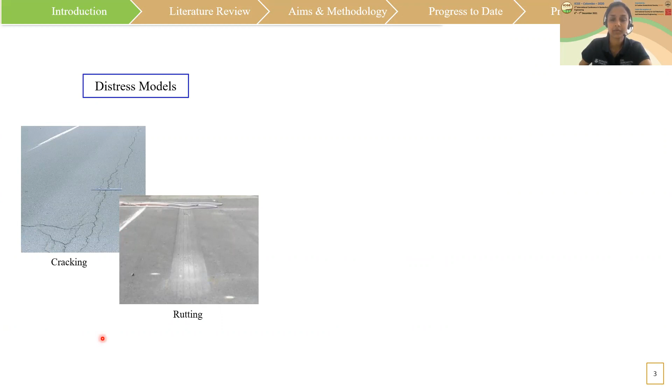To give a brief introduction, various pavement distresses, including cracking, rutting, wear, and deflection, are important indicators of pavement performance. There are many factors that affect how the pavement behaves, such as traffic loading, climatic changes, and pavement materials, which lead to these distresses. Therefore, it is important that we monitor these loads and temperatures to accurately predict pavement performance and also to make assumptions of rutting and fatigue phenomena.

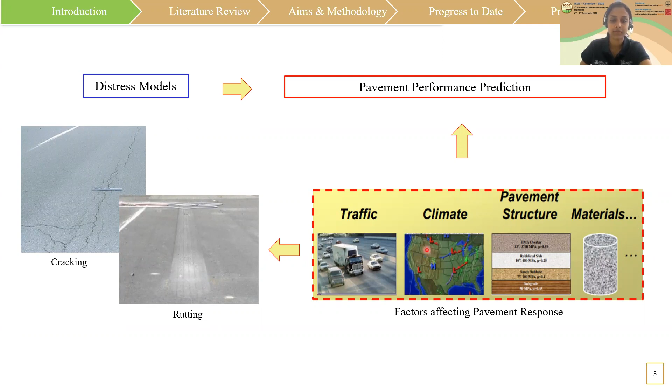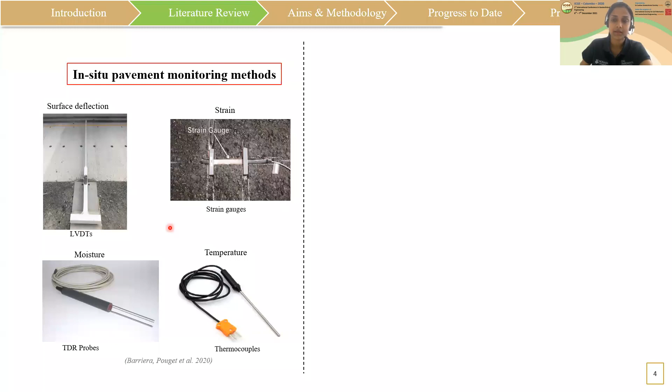Currently, pavement monitoring depends mostly on in-situ measurement techniques. These allow real-time monitoring of the road health condition in terms of stress, strain, deflection, temperature, and moisture content by integrating sensors within the road. However, most of the methods are intrusive, while they also can only provide information on discrete locations.

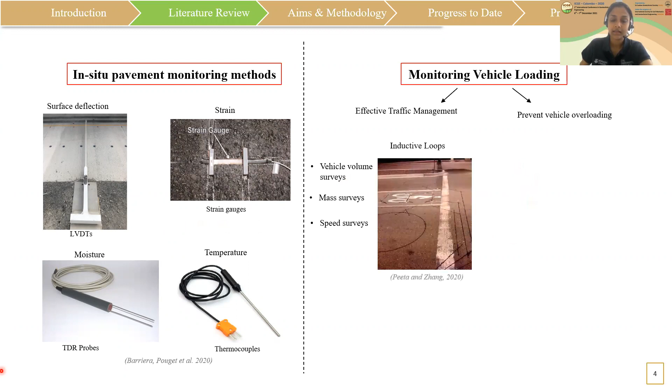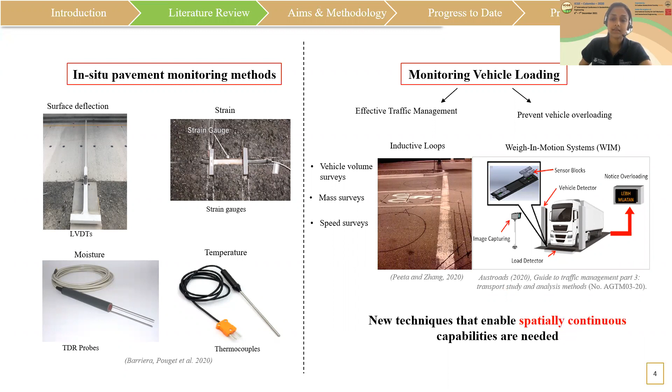Additionally, monitoring vehicle loading is also crucial for effective traffic management and to prevent vehicle overloading. For example, one overloaded heavy vehicle causes several times greater damage to the pavement structure than a properly loaded one. Therefore, vehicle volume surveys, mass and speed surveys are important. Inductive loops and weigh-in-motion systems are two of the most accepted technologies used by Australian road agencies for this purpose. However, the installation and maintenance of these systems are extremely strenuous. Therefore, it is understood that new techniques are needed that enable spatially continuous monitoring of pavements.

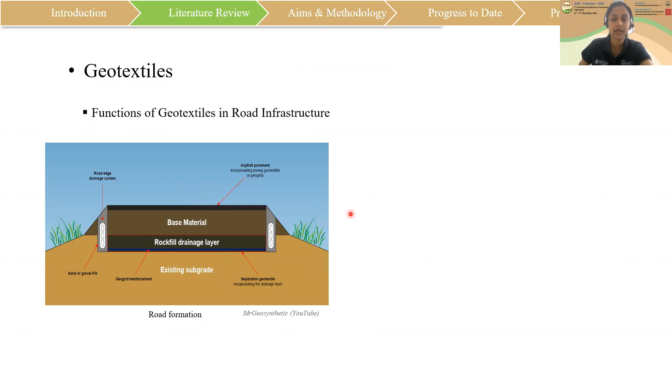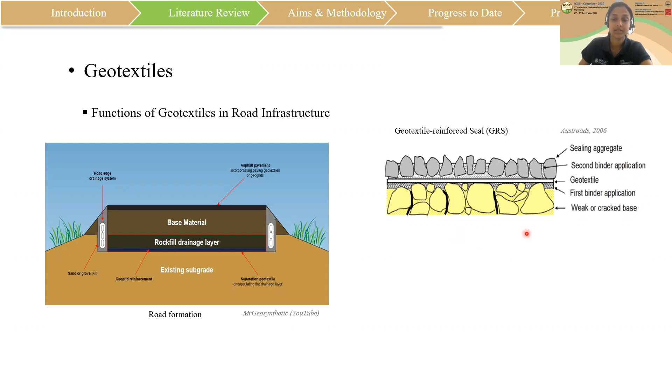Talking about geotextiles, in the scope of pavements, a typical road formation will have various components where geotextiles have applications in separation, reinforcement, drainage, and sealing. Also, nonwoven geotextiles are used in geotextile reinforced seals, or GRS, to reduce reflective cracking from underlying cracked pavements. Geotextile reinforced seals can be used to provide more robust waterproofing and as a SAM or SAMI treatment.

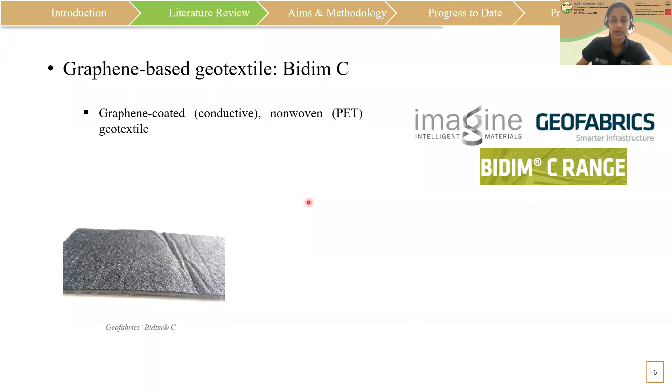Geofabrics Australasia, using the graphene technology of Imagine Intelligent Materials, has manufactured a graphene-based geotextile named Bidim C. This is a non-woven geotextile with the graphene coating on one side. Graphene is a highly conductive material, and the integration of graphene to the geotextile gives it promising conductive properties. It is used to test liners for defects via a closed electrical circuit forming at the leak location through the geotextile, and is currently used in waste, containment, and landfill applications. This invention provides a way to still keep the same purpose that the geotextile is designed for, with an added function of sensing, which enhances its benefit in any structure it is used in.

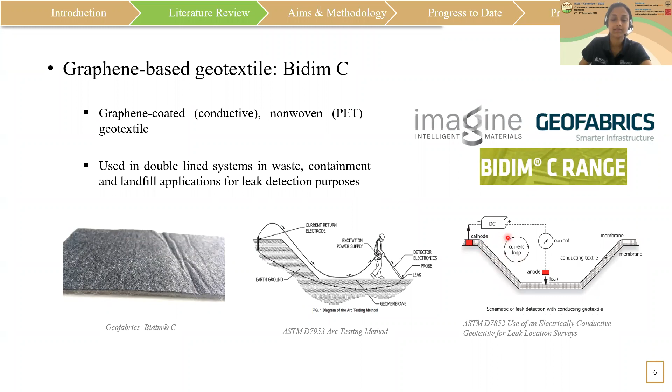So how can we potentially use this material in pavements? If we take this picture here, several current paths exist between any two points on this graphene coating. And as an external stimulus is applied, the connections between the graphene fibers or the conductive parts are distorted, which manifests as a change in electrical resistance. So if the material is conductive, its electrical resistance can indicate how much deformation the material has undergone. And when these two variables are reliably related, they can be standardized for field applications.

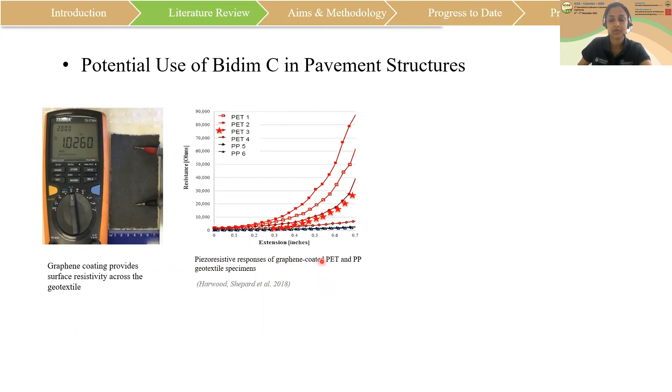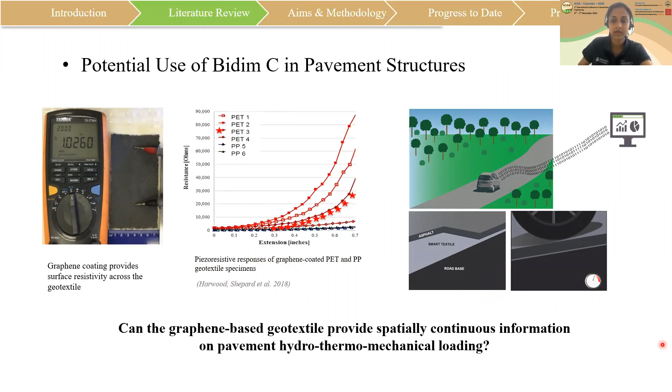This builds the key research question of my project: can the graphene-based geotextile provide spatially continuous information on pavement hydro-thermo-mechanical loading? To answer this, the project is arranged in achieving three main aims. The first is to characterize the electrical response of the geotextile under different loading conditions and to develop preliminary analytics. The second aim is to capture the response using an experimentally validated numerical model. And the final aim is to develop an appropriate field measurement technique.

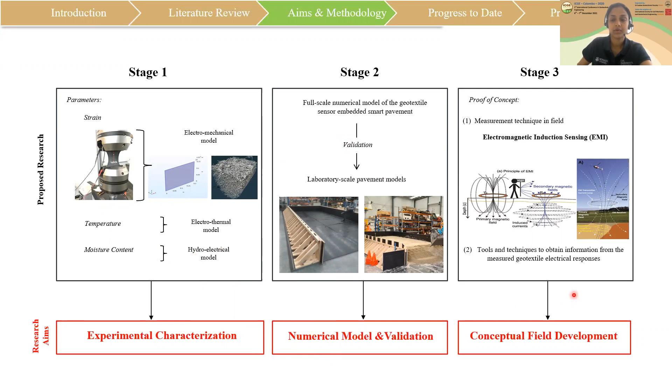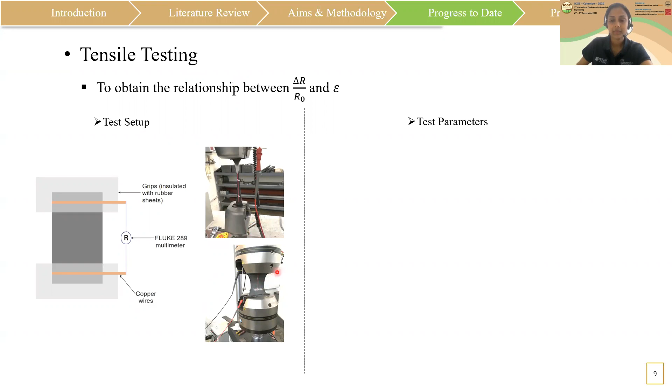Moving on to the research carried out to date, to characterize the material, tensile tests were conducted to obtain the relationship between relative resistance change and strain. The resistance of the material was measured while the sample was being extended. Test standard wide width tensile test parameters for geotextiles were used, and samples of both machine direction and cross machine direction were tested to find if there is any direction dependency in the electrical behavior. Four specimen sizes were used to see the effect of size on the resistance variation, and the obtained data was fitted into a linear curve to calculate the slope, also known as the gauge factor for each specimen.

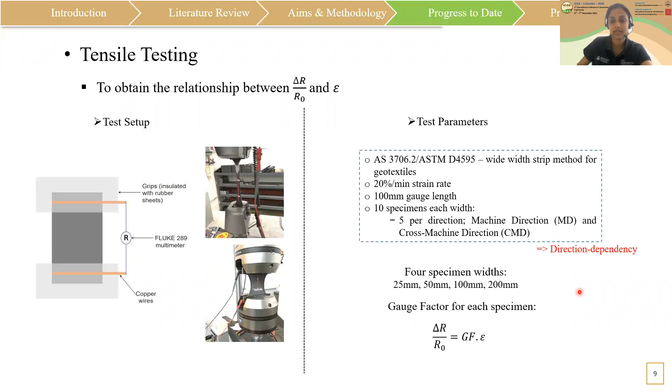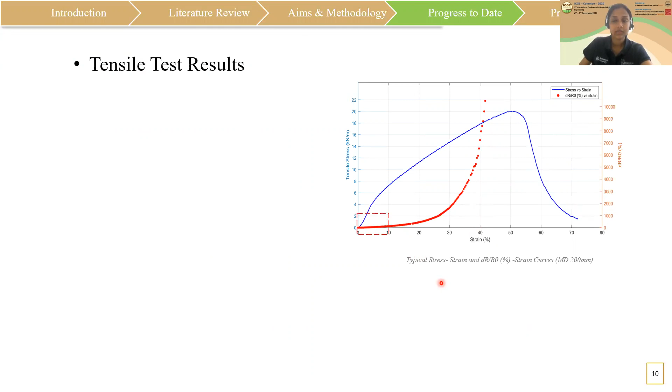This figure shows the typical stress-strain relationship and the dR over R naught versus strain relationship obtained by the above tensile tests. As this project is aimed at applications in road infrastructure, strains only up to 10% were used for further analysis.

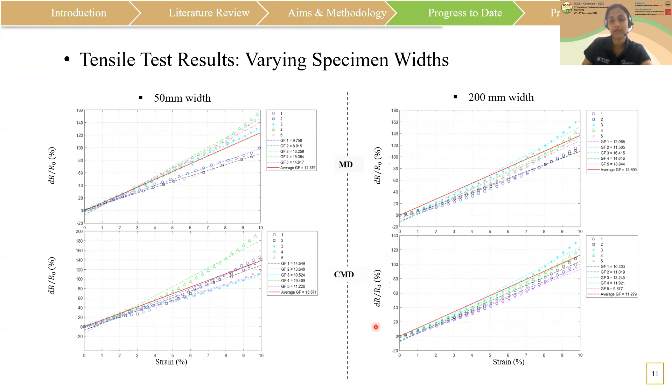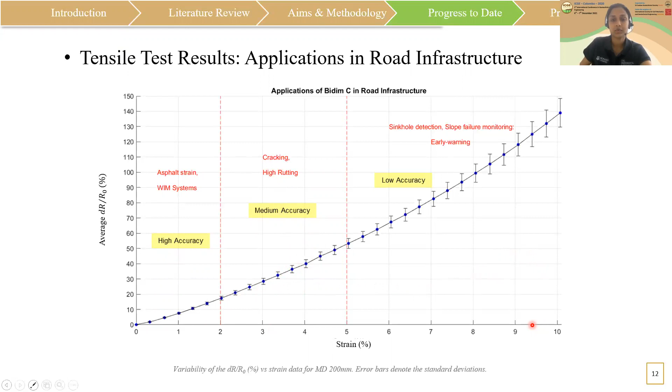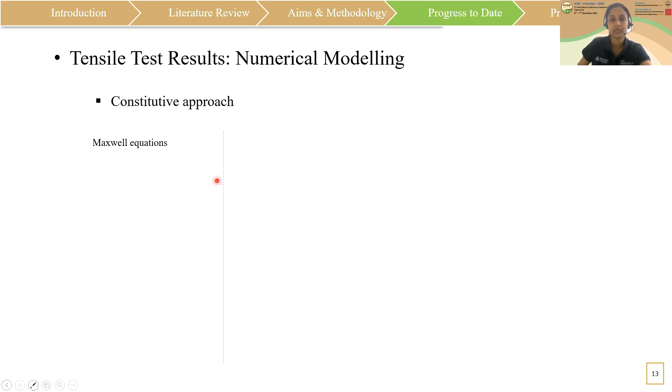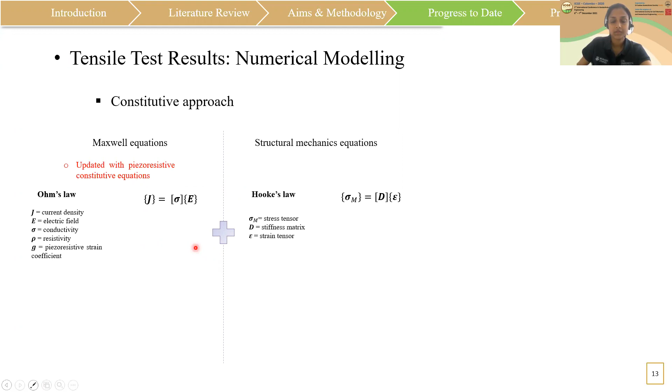To interpret the tensile test results from a macroscopic point of view, a constitutive approach is used by coupling Maxwell equations, which are updated with piezoresistive constitutive equations and structural mechanics equations as follows. The general Ohm's law is updated by the piezoresistive conditions to obtain the following updated Ohm's law for piezoresistive materials. The piezoresistive equations relate the induced strain to the relative change in resistivity using the piezoresistive strain coefficient G.

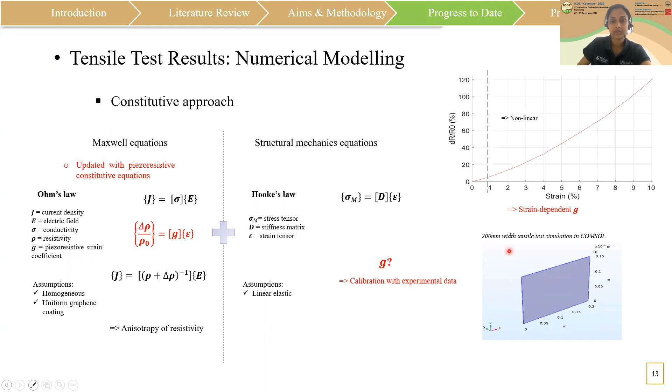A computational model was initiated in COMSOL Multiphysics platform, assuming the material to be homogeneous and the graphene coating to be uniform. The anisotropy of resistivity was also accounted for in the G matrix. Linear elastic conditions were assumed for the mechanical model, and the model was calibrated using the experimental data to find G. Also, strain-dependent piezoresistive coefficients are to be found to capture the non-linearity in the electrical response of the material.